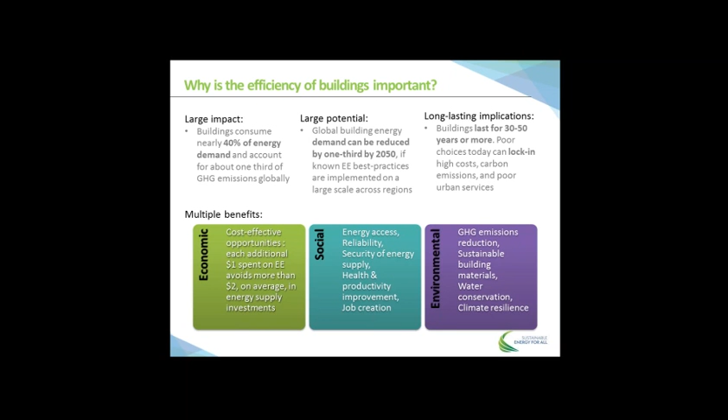And again, the long-lasting implications: buildings last for 30 to 50 or even hundreds of years if you look at the beautiful old historic buildings. Poor choices today can lock in high costs, carbon emissions, and poor urban services, to be avoided at all costs. There are multiple benefits in the economic, social, and environmental fields. Now, we have a building efficiency conundrum: the technologies are available and already cost-effective.

Clearly they will continue to develop and further evolve, but there are a lot of barriers in place. These are mostly behavioral and institutional, not technical.

We will be running a poll a little bit later to see what are the main barriers in your area. Awareness, technical expertise, performance uncertainty - a lot of these things need to be addressed very urgently, and can efficiently be addressed through a concerted effort by the partners in place, working also with national governments who need to ensure that the enabling framework conditions are in place. We need assistance in funding and financing, and we need good decisions that look at an integrated approach. Must overcome these barriers to achieve a deep efficiency, meaning a long-lasting efficiency.

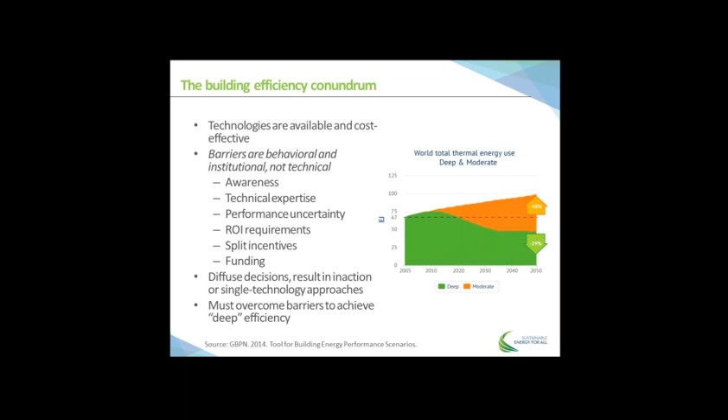Now, acceleration of policy efforts is clearly at the heart of this initiative. New partnerships will enable implementation of ambitious projects and policy packages that can address these barriers, bridge the efficiency gap, and avoid the lock-in of inefficient building stock.

In the Building Efficiency Accelerator, in brief called BEA, cities are encouraged to sign up to. What are they required to do, and what are they committing to do? The overarching commitment is to double the rate of building efficiency by 2030 in the targeted sector of its geographical jurisdiction. We need to create a baseline to understand the performance of the buildings in that area, understand which interventions are possible, and cities need to commit to implementing one enabling policy and one demonstration project, which will be announced at COP21 in Paris.

In Paris, at the COP, there will be a key decision impacting the whole world globally on reducing greenhouse gas emissions, but also on encouraging adaptation to climate change and enhancing resilience. Buildings need to deal with both of these aspects as well.

The third commitment: cities need to track, report annual progress, and share their best practices with other governments. We will implement activities in two phases. The light touch will be open to all local governments, and the deep dive will involve more selective work with a few cities, mostly due to limited funds available, focusing on development, implementation, and improvement phases. However, all cities will be able to benefit from the light touch approach.

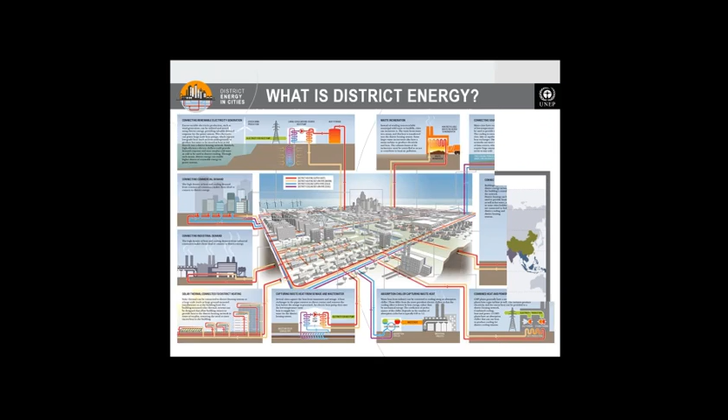As you can see on the screen, district energy is a broad approach - modern district energy systems combine district heating and cooling with elements such as combined heat and power, thermal storage, heat pumps, and decentralized energy. It's important to understand that the basics of district energy are no longer just providing heating and cooling services through heat infrastructure, but really combining various technologies and applications in an integrated approach.

So why is district energy important? We all agree that climate and energy are key priorities, but the heating and cooling sector has remained unaddressed. As we're discussing today, half of the energy consumed in buildings is for heating, cooling, and hot water services, and the majority comes from fossil fuels. So clearly, urgent solutions are required that reduce demand and shift supply if we're going to achieve our climate and energy ambitions. District energy is a solution that allows us to address both simultaneously.

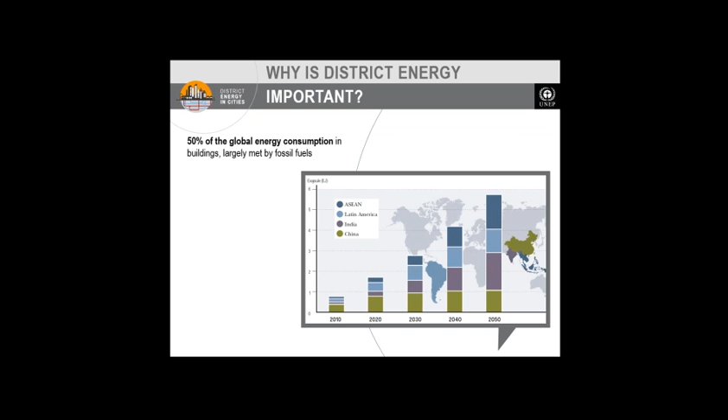For many cities around the world, district energy will be essential to reaching 100% renewable energy and carbon neutral targets. With district energy - the combined heating and cooling of buildings - we can not only make city-level energy infrastructure more efficient, but also integrate renewable energy sources while reducing cities' coal and oil consumption and therefore reduce costs. We'll see this in the next slides.

For example, district energy provides the scale and infrastructure to connect large-scale renewable energy and waste heat, which otherwise cannot be connected to buildings on an individual basis. So many cities like Paris, Tokyo, and Toronto are connecting sources of free cooling, for example, to replace air conditioning or other decentralized solutions.

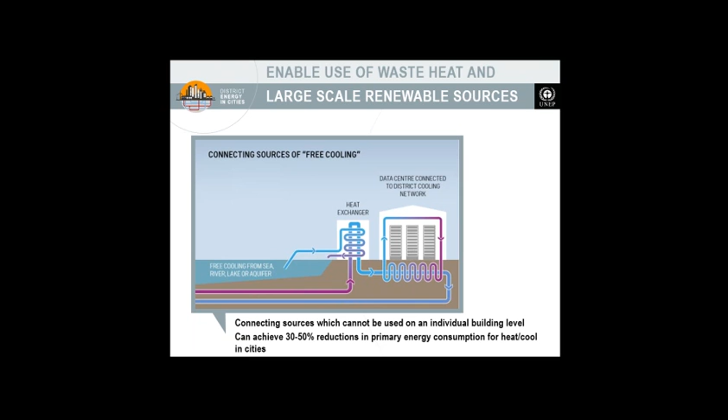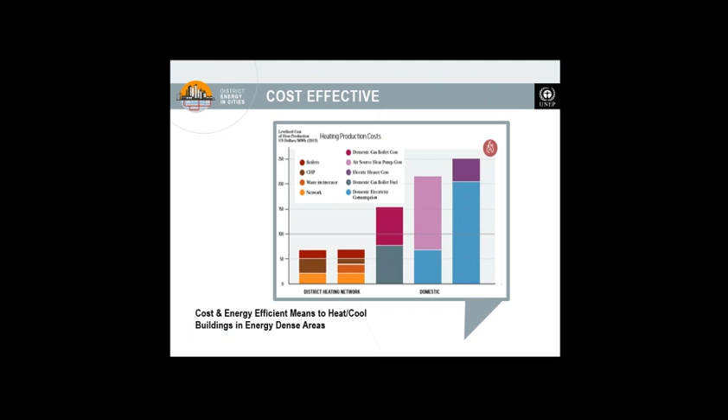In regions, neighborhoods, areas, and cities with high heat and cool demand density, district energy is actually frequently more cost-effective than individual building solutions. We found in our publication that it can be up to 50% more cost-effective, depending on the heating and cooling demand density.

So these various benefits are not only associated with improving energy efficiency and connecting renewables. There are multiple benefits that come from developing modern district energy systems. In researching district energy, we at UNEP, ICLEI, and Habitat identified that more needs to be done.

can combine their expertise and efforts to address the barriers to district energy. Only by harnessing the expertise that is in the field can we accelerate efforts that are already ongoing and support cities to deliver low-carbon, energy-efficient, and cost-effective district energy systems.

We have 3 core objectives that have been agreed to and have emerged as core areas to address with our partners. These include increasing awareness on the multiple benefits of district energy, as I've already mentioned. Many think it's a technology that is only about heating, for example, or that it's confined to certain countries. So we want to really shatter these myths and showcase best practices.

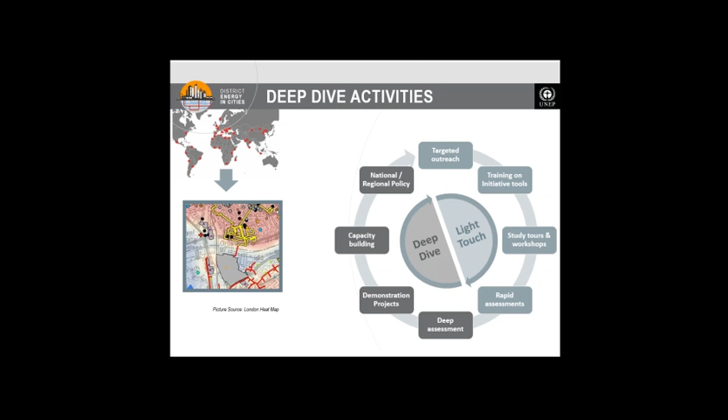The initiative has already begun light touch and deep dive activities, and at the moment we're focusing in Asia Pacific for district heating in China and in India for district cooling. We're also engaged in other regions, in Latin America as well as Eastern Europe.

The various activities that will be undertaken in multiple regions are here for your reference, which includes, in each region, aiming in the next 2 years to complete 5 country assessments. We'll be looking at 25 cities with very diverse climates, so we can have different prototypes for methodologies and replications. We'll be doing 5 demonstration projects, including the policy investment roadmap in the cities, and there will be attracting project co-finance for implementation, then looking to scale up through regional capacity building, learning, and replication.

I just want to underline that the methodologies we're undertaking in the capacity building and training activities are really rooted in a technical guide that was developed over the last 2 years and launched in February 2015 by our executive director.

It's a UNEP flagship publication that was entitled District Energy in Cities: Unlocking the Potential of Energy Efficiency and Renewable Energy. UNEP, ICLEI, UN Habitat and C2E2 worked with many partners of the District Energy Initiative that are now continuing to deliver these trainings in over 45 cities worldwide. And together, the publication with the cities came out with concrete policy, finance, and technology best practice guidance, very detailed, on addressing the heating and cooling sector in cities through the improvement of efficiency and integration of renewables.

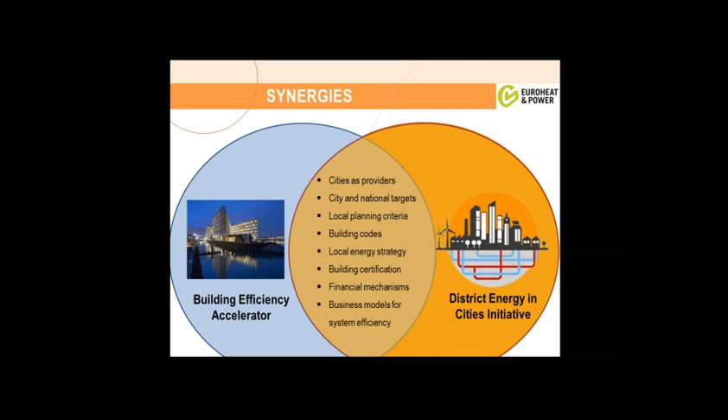But there are also some technical synergies, not just synergies in belief or the system approach as such. If we look at district energy systems, then what they can do for efficient buildings is to give them an efficient supply of locally available resources that otherwise would be wasted in the surrounding. But at the same time, efficient buildings allow for the utilization of heat sources that we couldn't use in inefficient buildings because the temperature is simply too low. This just as a very basic technical point of view.

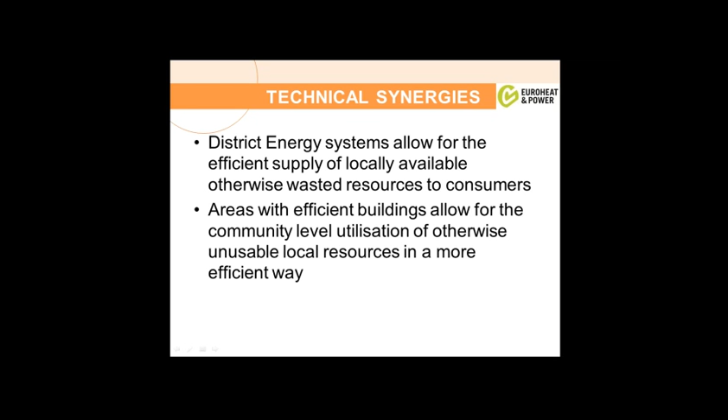Now, I already said that there are things going on at the national level, and I would like to have a look with you at the EU example, which is clearly not purely national, but counts in this case. We have a split approach. It's not really policy integration. We have the building level on the one side with the Energy Performance of Buildings Directive, and the system level approach on the other side with the Energy Efficiency Directive.

In the Buildings Directive, we have a nearly zero energy building target, which states that you should have buildings with a very low energy demand, and this demand should be supplied by renewable resources, including nearby and on-site. So you would think that district heating and cooling is integrated in this approach, but still the definition is very vague, and the national definitions depend on reference cases and on cost optimality studies.

Those cost optimality studies can be done in two ways. You can have a macroeconomic study, taking into account all the system level effects, or you can have an individual building system study, an investment-based study that does not take into account all the macroeconomic effects. Now, the idea of district energy is to use those macroeconomic effects, or to increase those effects. And logically, if you don't take them into account, then you cut out this idea, and all you do is concentrate on decreasing the energy demand and on increasing on-site production.

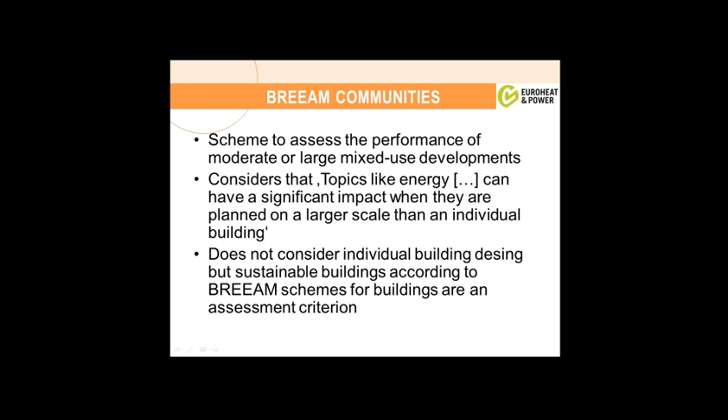What it includes, and what we generally think is important, is that there needs to be an economic assessment and an energy strategy comparing different solutions. This is what is missing in the European or in the EU scheme. Neither for the building side is there a mandatory comparison, nor on the national scheme. Then

it states that site-wide demands need to be taken into account, so not just single buildings within the construction. The connection to and the construction of DHC need to be taken into account, and low to zero carbon sources nearby and on site can be taken into account. But as I said, the scheme requires efficient buildings, so we see this link. And if we look into the sustainable building scheme, then we have also mentioned there that a study must identify whether heating grids might be more beneficial than individual solutions.

Now, these are voluntary schemes, and on the mandatory side or on the legislation side, not that much happens. And we, as I mentioned before, hope that linking up the two UNEP initiatives might fill this current policy gap. And we really believe that combining those on the city level will help shaping the future framework.

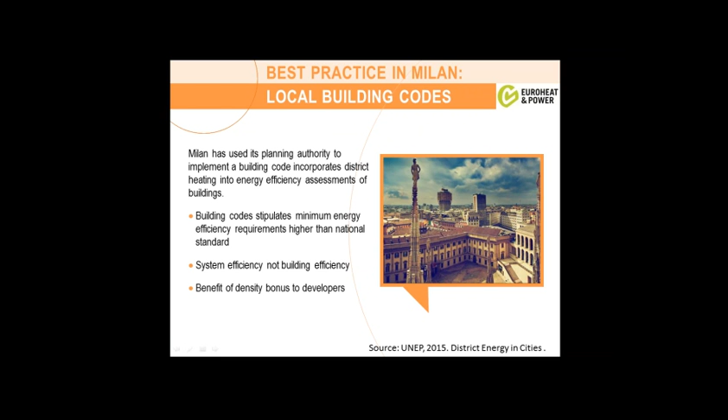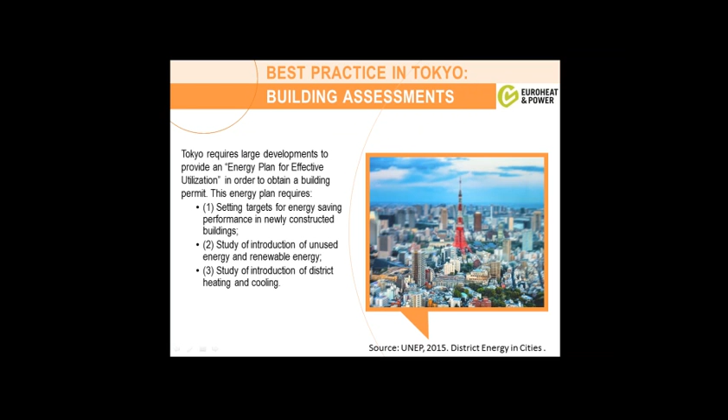Last, there would be Paris, where they do zonal planning and decide in which zones district heating and cooling is a good option, and ask the building owners to check whether it makes sense to connect. This is just a very short introduction to those cities. You find them all in the publication.

This is something we could talk about for days, but I'm not going to do so. Just keep in mind, only with the connection, with the linked efforts between building side and the system level, can we come to a cost-efficient, cost-effective and optimal sustainable solution in the end. If you have further questions, please get in touch with me. And otherwise, thanks a lot for the attention and the opportunity, and I pass back.

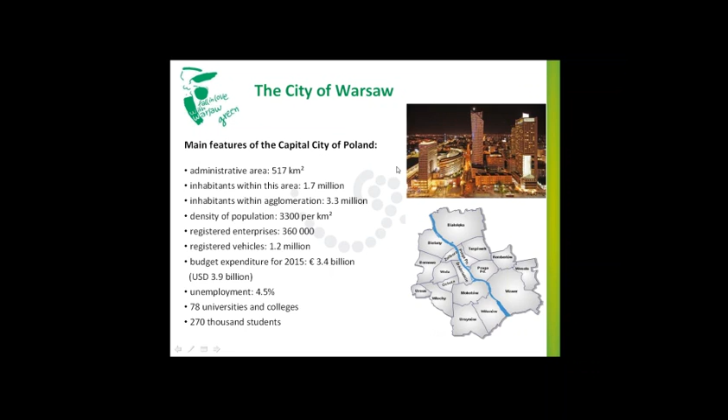Starting from the first information about the city, I'd like to stress only two numbers. The first is the number of inhabitants, 1.7 million, and the budget expenditures, 3.4 billion. It means that we have 2,000 euros per inhabitant in Warsaw. This would make it easier to understand our policy in terms of costs.

From our goals, we are still keeping our sustainable energy action plan in action. So we are basing on this, trying to reach these goals the same as in European policy: to be more efficient by at least 20%, and to be more climate friendly, reducing CO2 emissions by at least 20%.

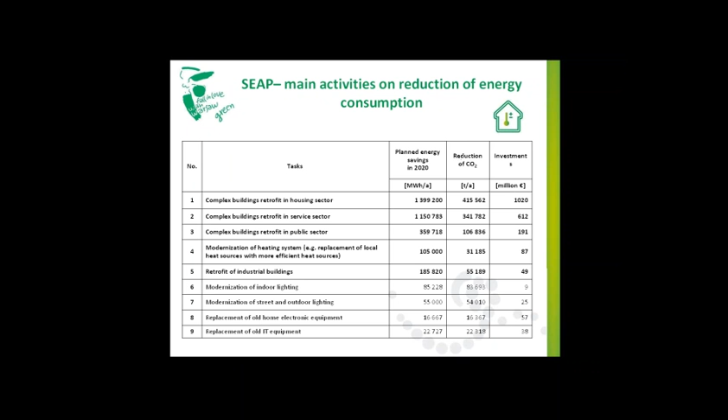In our sustainable energy action plan, we have a lot of goals with the retrofit of buildings in the housing sector, service sector, and public sector, and of course modernization of the heating system. In this area we are planning, and we are expecting investments at the level of about 2 billion euros.

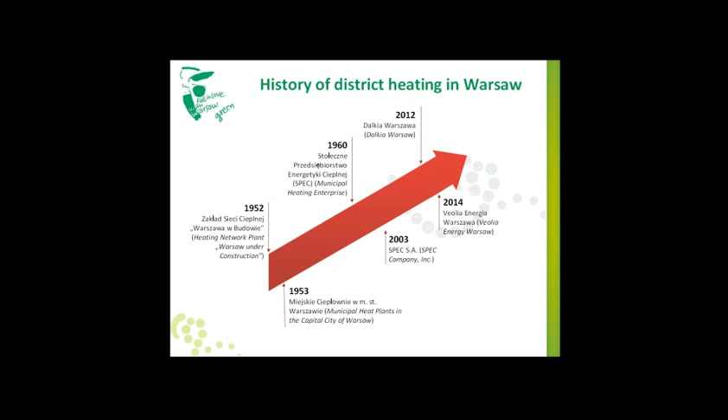The district heating system in Warsaw is an interesting case. It started organization in 1952, and in 1960 the municipal heating enterprise was established. In 2003 there was the commercialization of our company. In 2012 the city of Warsaw sold this company to the French company Dalkia, and currently the owner of the district heating system in Warsaw is Veolia Energy Warsaw.

So this privatization gives us new space for the works in this system. These changes in ownership structure give us new possibilities for benefits for citizens, and of course we have guaranteed investments secured by the contractor in this process.

The system is the largest in the European Union, next to Berlin. The network is larger than 1,700 kilometers, and we have 78% of citizens connected to the system. So this is, I think, a pretty good number.

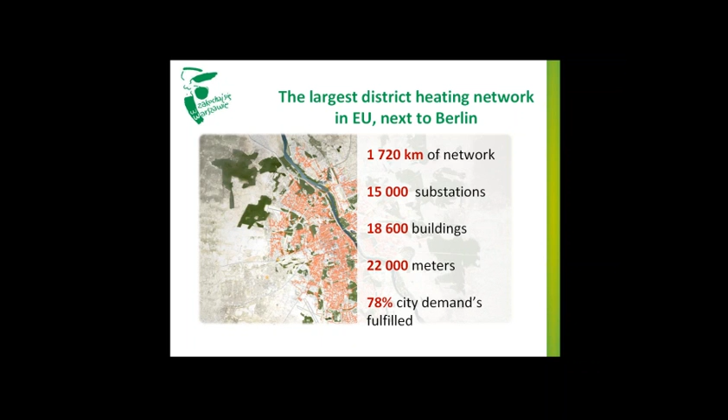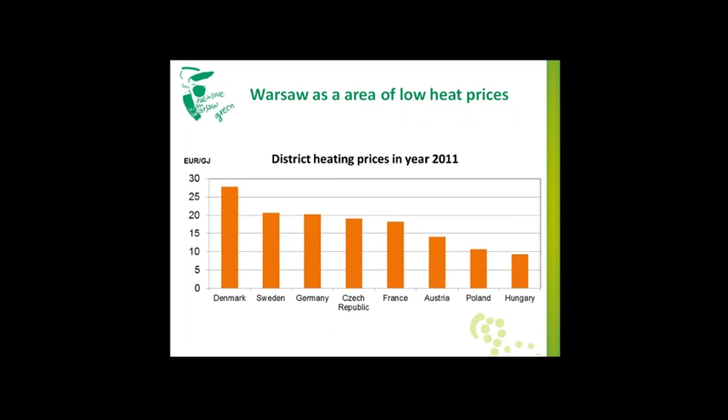The number of turnovers is really good and interesting, but our main interest is to keep the prices in the district heating system at a good level, attractive for citizens, to attract them to connect to the system. As you see on this graph, only in Hungary can we have lower prices in the district heating system in Europe. But when we look at the prices in Poland, you can see that Warsaw is the cheapest large city in Poland.

So our system is really working efficiently and giving space for development. And of course the system is cheaper than electricity, cheaper than heating fuel, and cheaper than natural gas.

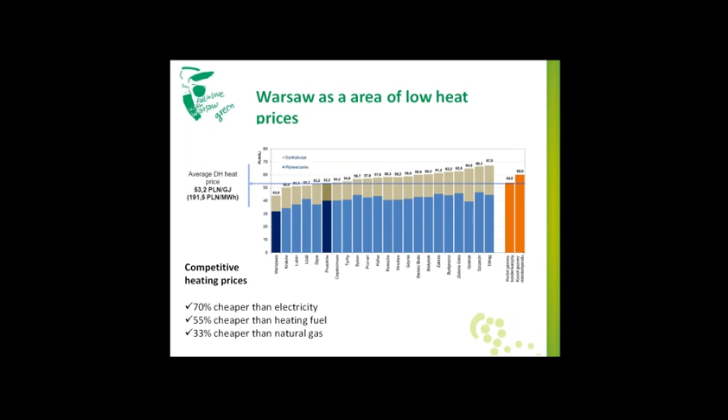Also an interesting case is our modernization of the wastewater treatment plant, where we are now producing electricity and heat from biogas and from sludge. This production is giving us about 30% of the energy consumption for the street lighting system in our city, so it means it's really efficient.

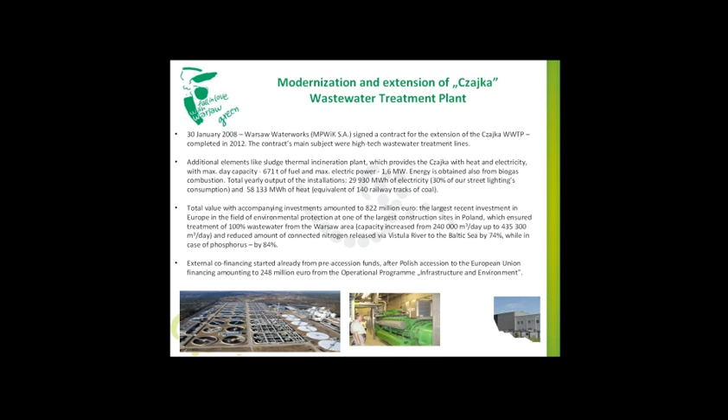Some projects we have currently finished in Warsaw are in the field of energy efficiency in buildings. These are projects financed by the European Union, like the Open House project and E3 Soho, where we were testing ICT technologies for building efficiency together with Genova and Saragossa. There's also the ICE-WISH project, and we are starting new European projects to work on efficiency at a large scale, thinking about 3,000 households in the project to test possibilities for improving the model of energy efficiency in buildings.

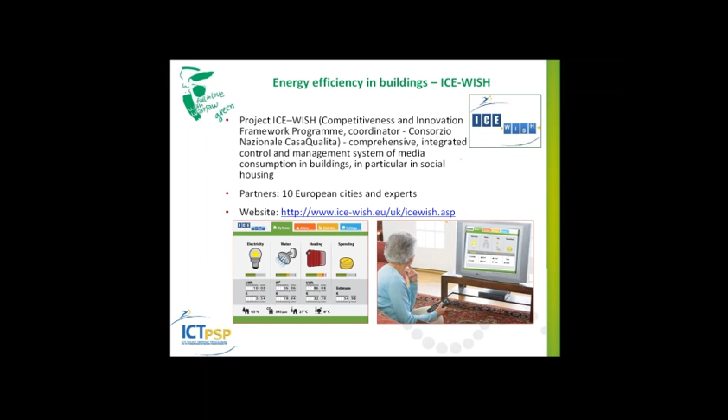And this is from my side almost all. Only one word I'd like to add before finishing: last Sunday we had a picnic with climate in Warsaw, where we were promoting energy efficiency, but mainly we were promoting climate affairs among our citizens with the subject of COP21 in Paris. So this is also our work, to promote and speak to our citizens about important aspects like climate protection in the perspective of COP21 in Paris. Thank you very much for your attention.

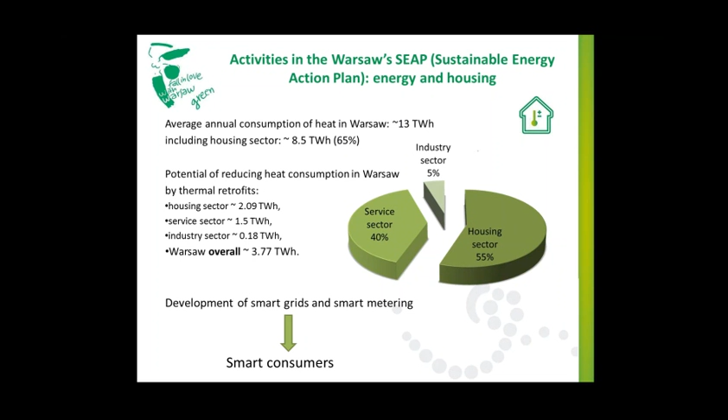Of course, reducing energy consumption also requires development of smart grids and smart meters in houses. We already have progress - the first smart meters have been installed. When you have smart meters and consumers that know how to limit energy consumption in their households, and we are trying to assist Warsaw citizens in that, then we have really smart consumers that do not overpay for energy.

But these thermal retrofits that I have mentioned have in majority been quite simple actions, like replacement of old windows, old doors, and adding additional insulation. But as our SEAP states, we are already thinking about more advanced buildings, and such buildings already exist in Warsaw, either after very exhaustive thermal retrofit or as brand new buildings. So we want to introduce passive buildings, low energy buildings, in the wider category of energy efficient buildings.

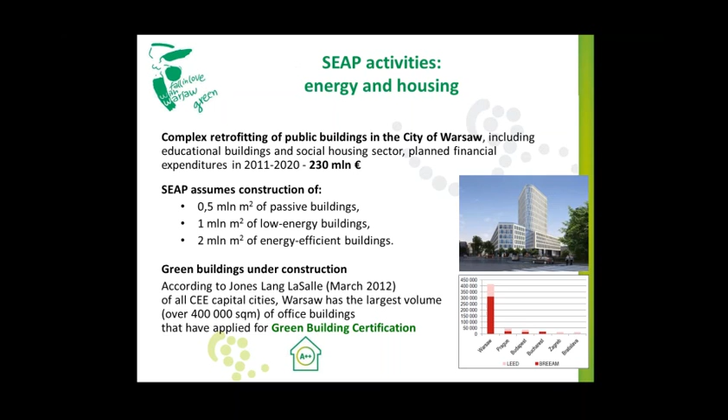Such buildings are already being constructed, mainly by companies active in Warsaw, because there are many office buildings. We were quite surprised to discover a couple of years ago that Warsaw has such a huge volume of office buildings that applied for one of the building certifications like BREEAM or LEED - that is over 400,000 square meters of area covered by such certification.

All different minor EU projects and our actions in the field of energy efficient buildings are meant to, of course, ultimately help Warsaw become a really energy efficient, smart and intelligent city. But it is, of course, the task for decades.

So first we want to create and implement the pilot project of the low carbon area in Warsaw, patterned after leading solutions like Stockholm's Hammarby-Sjöstad or Berlin's Europa City. We want these pilot projects to cover an area where there will be model solutions in the field of spatial planning.

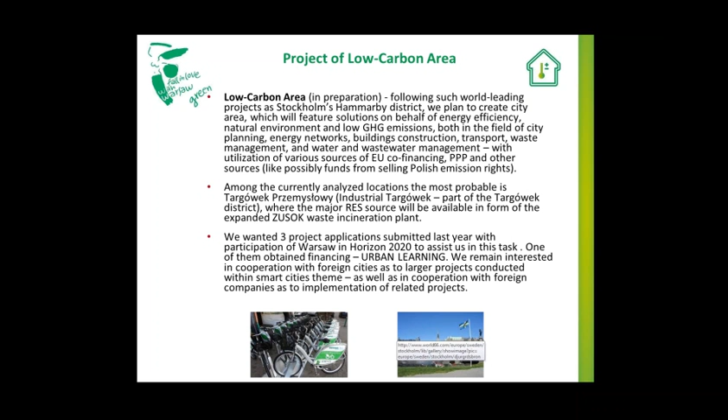The most probable for us is Targówek Przemysłowy, industrial Targówek, because there is a source of clean energy there, that is ZUSOK, the waste incineration plant, which will be substantially extended and modernized in the coming years.

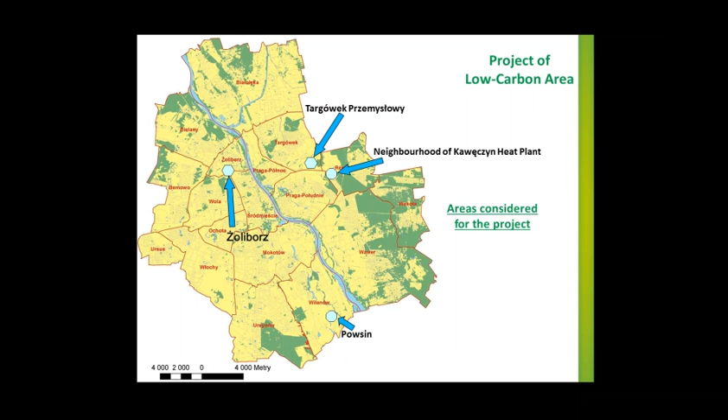You have Urban Learning, which will also help us with creation of the low carbon area, because this project is about integrative energy planning. So we'll be mutually learning and cooperating with Berlin, Vienna, Stockholm and Paris on how to integrate energy aspects in municipal planning processes, which will help, for instance, with refurbishment projects in Warsaw.

Another project is Step by Step, which is meant to reduce energy consumption in households thanks to cooperation with users. We are targeting 9,000 households in 4 countries, including 3,000 in Warsaw.

Then we have more technical projects, like Heat to Gap, about building monitoring and control tools, allowing us to better assess the building energy performance data, which is to lead to better energy performance of the building.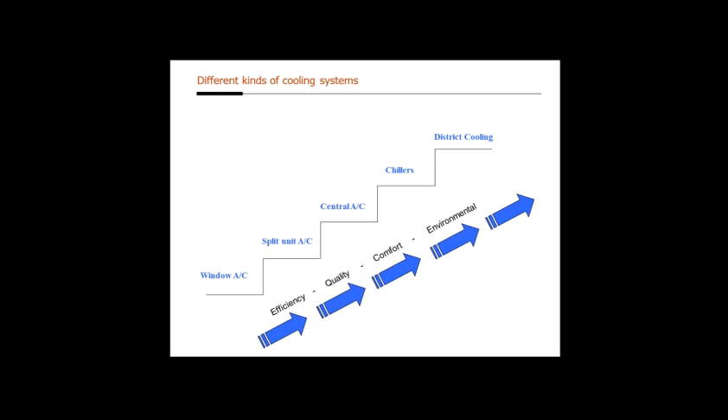Just to give some different kinds of cooling systems available: usually it's window AC in our area. We have split units, central AC, and chillers and district cooling. Going system to system, you can see that efficiency, quality, comfort, and environmental friendliness are greater when you use district cooling. So again, we are talking about a system where it can provide all of this to cities, and everybody can benefit from the system.

The concept itself has already been explained in many previous presentations. We're talking about a cost-effective system with a central plant, and from this central plant you distribute the chilled water through a pre-insulated pipe underground, and deliver that to buildings.

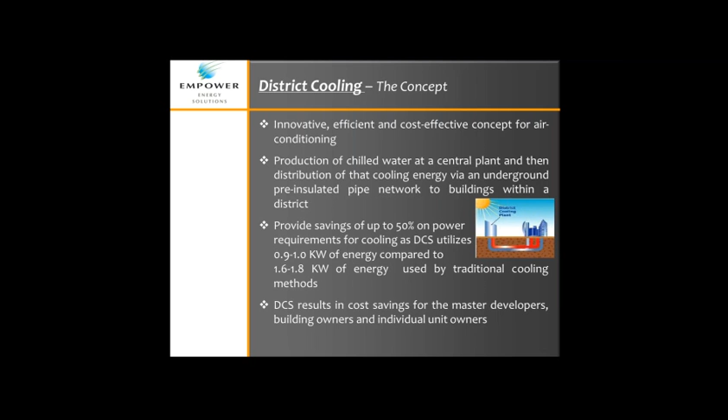This system provides almost 50% power saving compared to the traditional system, which takes about 1.6 to 1.8 kilowatt per ton, whereas district cooling usually takes less than 1 kilowatt per ton. This is definitely in our area, based on statistics related to our area. The result for district cooling system is cost saving for the master developers, building owners, and also individual apartment or household owners. The major beneficiary for district cooling is the government and the utility developers in terms of power.

Let's try to summarize the benefits for district cooling: 50% power reduction, reduced power generation infrastructure, and reduction in greenhouse gas emissions. Lower life cycle cost — we are talking about a system that can work between 30 to 50 years against a traditional system which lasts 12 to 15 years. It's a reliable system, usually around 99.999% reliable, around the clock, with a lot of redundancy.

Adding value to buildings by using district cooling system, you free significant space from the building, reduce vibration and noise level when the system is running, and it's easier for operating maintenance because we ask the building owner to outsource the services instead of building his own system. All of these give a lot of advantages and benefits to district cooling.

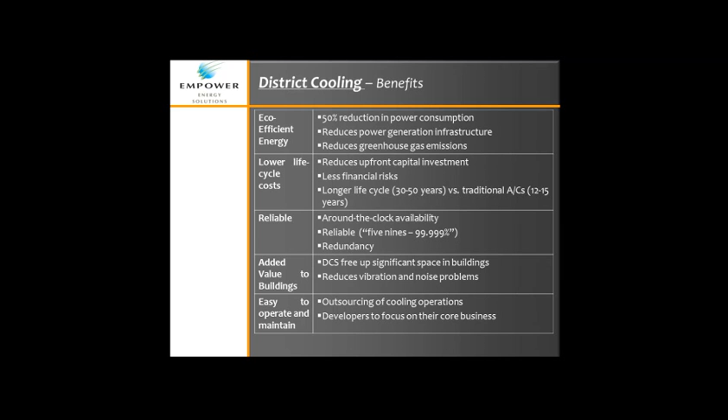So in terms of storing the chilled water to be used during the day — storing at night, using during the day — this gives another advantage of using the district cooling system.

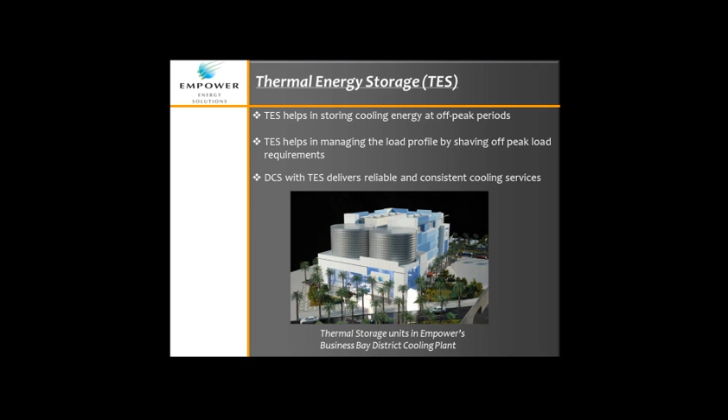We also found that, as you are aware, we use centrifugal machines with cooling towers, which require a lot of water. So we stopped using fresh or potable water and started using treated sewage effluent (TSE) water, which helps us reduce and better utilize water consumption, giving a more environmentally friendly system. The number of cycles now created allows us to use the water for longer, and this is definitely cost effective and cost saving. Today we are a pioneer in this industry, and we are able to use TSE water in different types of plant rooms like Healthcare City, DIFC, and many others.

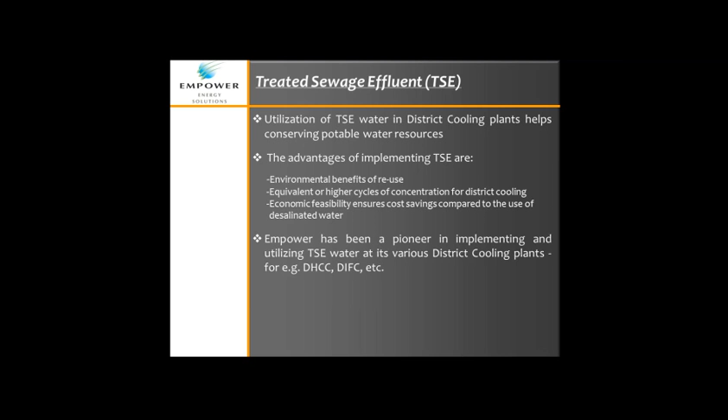Again, the TSE — because of water availability in our area being an issue — becomes the solution instead of using fresh water.

What is the total benefit of using district cooling? As we said, better utilization of energy resources, lower utility infrastructure, and better energy accountability by metering the end user. District cooling is a cost-effective alternative for our area, and it has become supported by the government, where we see that district cooling is the way forward.

We have mentioned the total tonnage — Empower at the moment operates around above 1 million tons. We have approximately 50,000 customers, end users receiving monthly bills for their consumption. We have around 750 buildings currently served from our network and plant rooms. We currently have 62 plant rooms around Dubai, and most importantly, we have saved 836 megawatts on power by using district cooling, compared to the same cooling being produced by other methods of air conditioning.